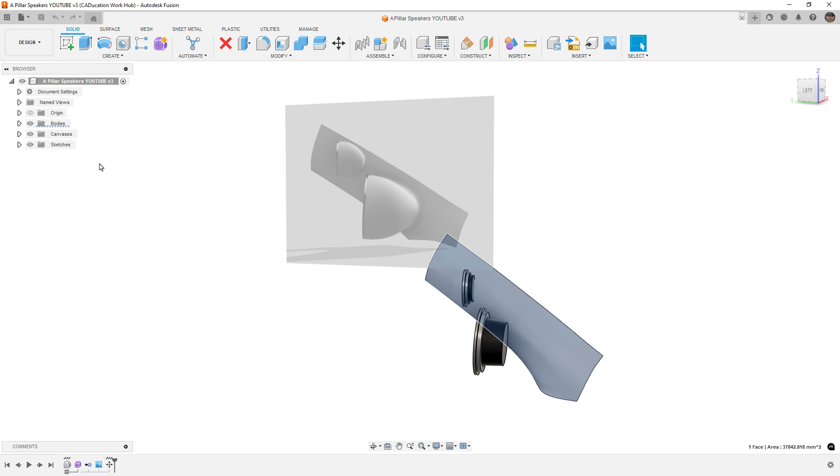Now, the problem when we're talking about doing surfacing work is, one, figuring out how we want to create the geometry. That's always something we need to consider when we get started. And two, figuring out how we're going to turn this into a solid model that can be manufactured, whether it's 3D printing or some other way.

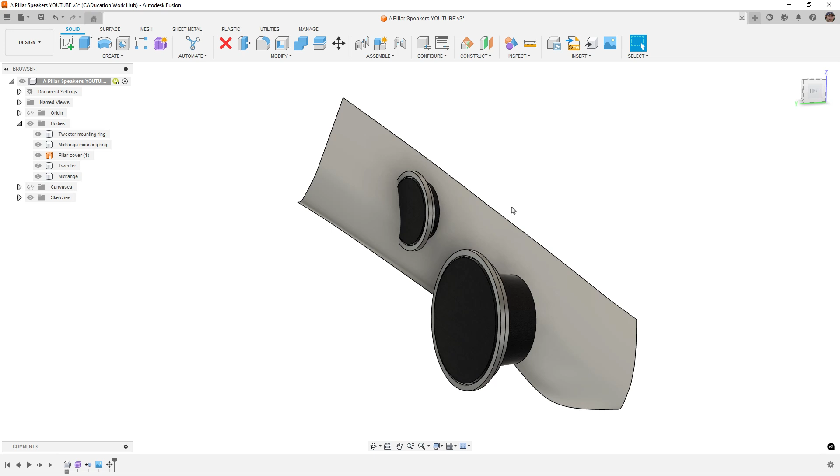Now the end goal for this user is to 3D print this. The idea behind it is that it'll get wrapped with some sort of cloth for the interior. But we understand, based on the way the speakers are positioned, that the original A-pillar is somewhat sacrificial. It's going to have to be cut because the speakers are nested into them.

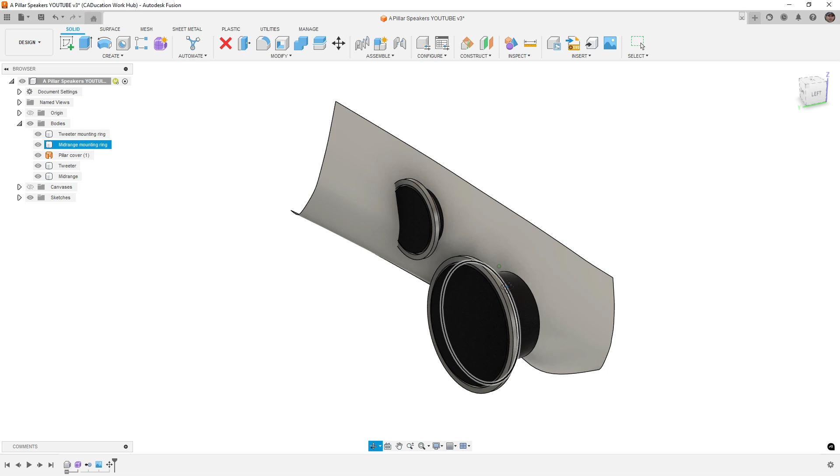A couple things we need to think about: the tweeter itself is well into the housing here, which means the approach we take for that model is likely going to be different than for the larger speaker, because this one is kind of completely outside with the exception of this back corner. So what I want to do is start with what I think is the easier one.

That's the mid-range speaker. So we'll hide the tweeter and the tweeter trim ring.

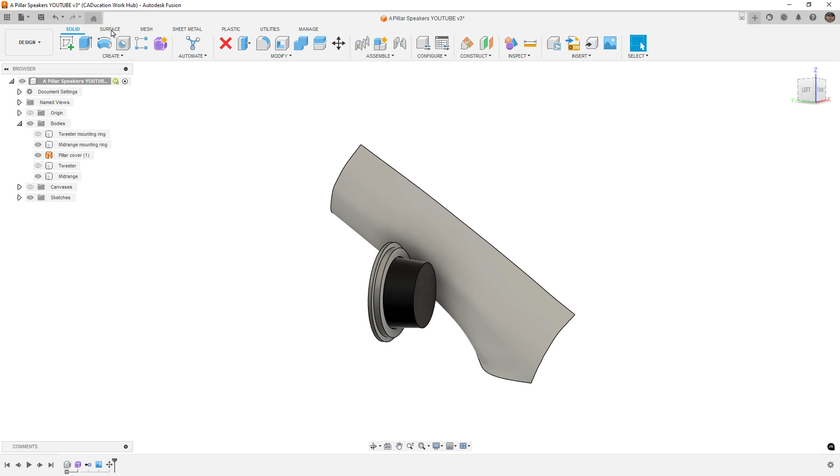So what I'm going to do is talk a little bit about lofting to a point. We're going to go to our surface tools to get started. I'm going to create a new offset plane off the back of the speaker to figure out where I want this pod to be. Let's say maybe 50 millimeters back.

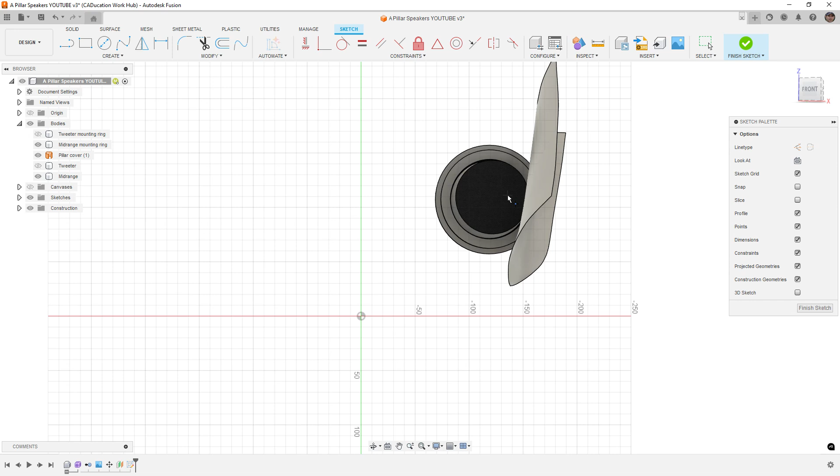And then we'll create a sketch on that new plane, and we're going to create a sketch point. I'm not going to define this with dimensions, I simply want to play around with it a bit. I'm going to put it right there.

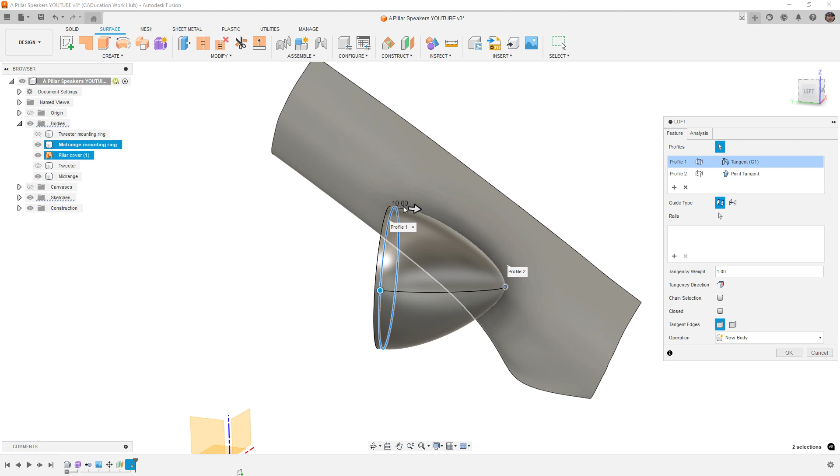And then I'm going to go to my create loft, and I want to loft to a point. So I'm going to pick the back edge of this trim ring and go to that point. The main reason we want to do loft to a point is because we have point tangency, and we've also got tangency from the edge we selected. This gives us the shape pretty much right off the bat.

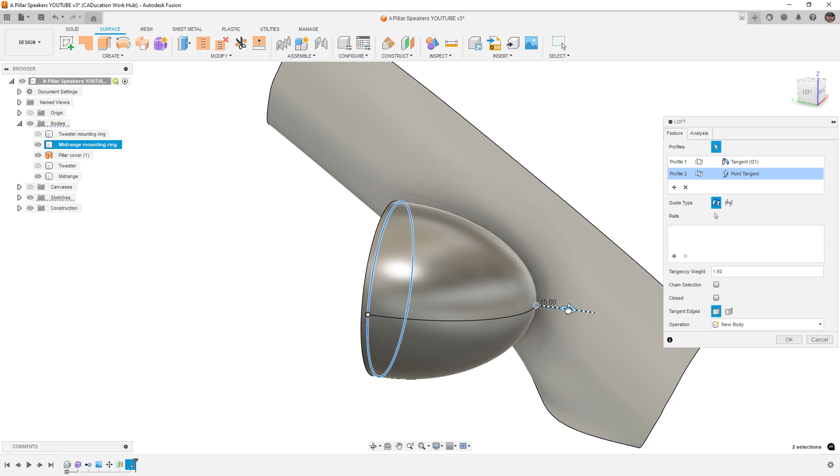We don't have to do too much. We can play a bit with the tangency weight, so if you want it to be a bit more rounded, we can push the tangency weight back to 1.5. We also have weight at the point tangency, so we can increase or decrease this. Basically, with a point tangency, this is controlling the surface going into it from every direction. And I think this looks all right.

And we've got a nice amount of overlap with the rest of the A-pillar. So I'm going to go ahead and say okay with that.

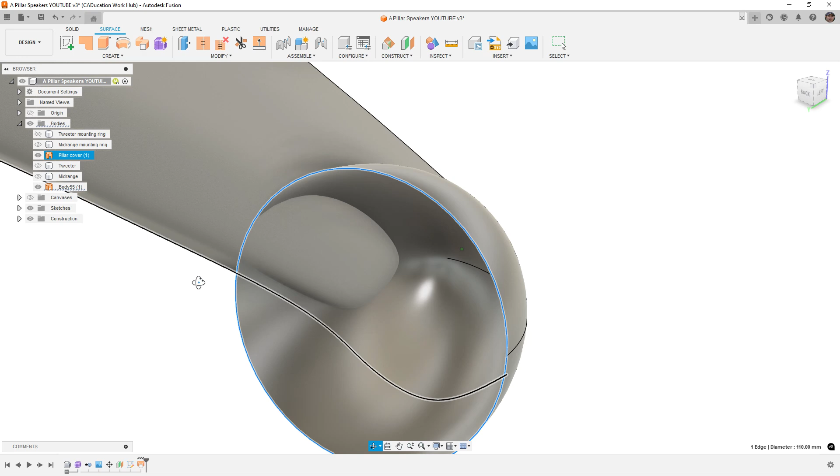I want to hide the rest of the solid bodies, and now I need to think about how we're going to build this. You can see right now the edge of the surface does not extend far enough to actually cut through. We can see that the inside A-pillar bleeds over this edge.

So we'll either need to go through and extend this forward, which is one potential option, or we need to patch the front of this. And when we patch it, what we want to do is stitch these together because they need to be one surface, but now it's completely enclosed.

It's what we consider watertight, which means it automatically turns into a solid body. The problem here is we need to trim surfaces, not solids.

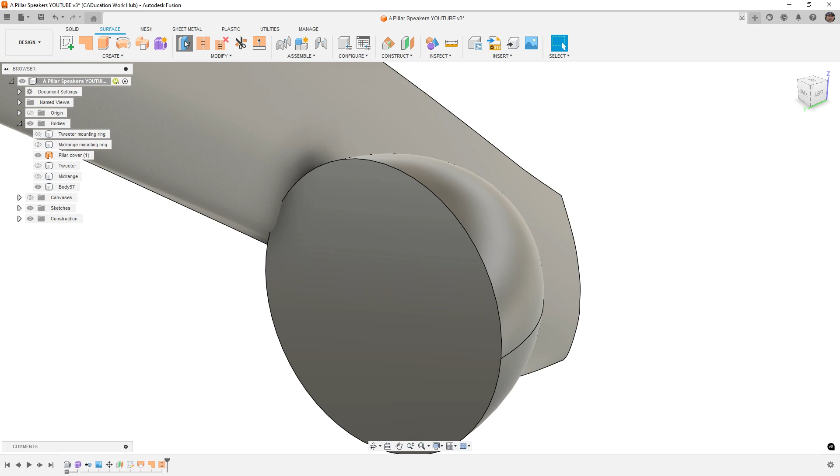But what we're going to do is use split body, select the A-pillar surface as... hold on, let's go ahead and step that back. What we want to do is split body. I picked offset face. We want to split the new speaker housing, and we want to use the A-pillar to do it. So this little piece that gets left inside, we're going to right-click and remove.

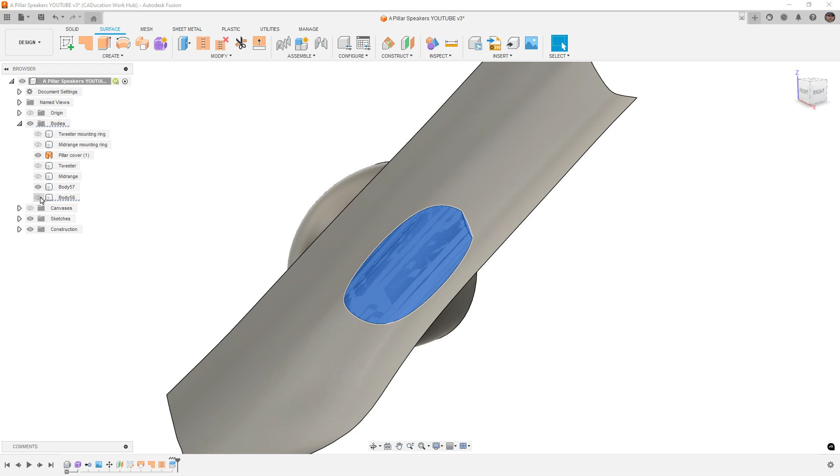We don't need it. We'll hide the A-pillar.

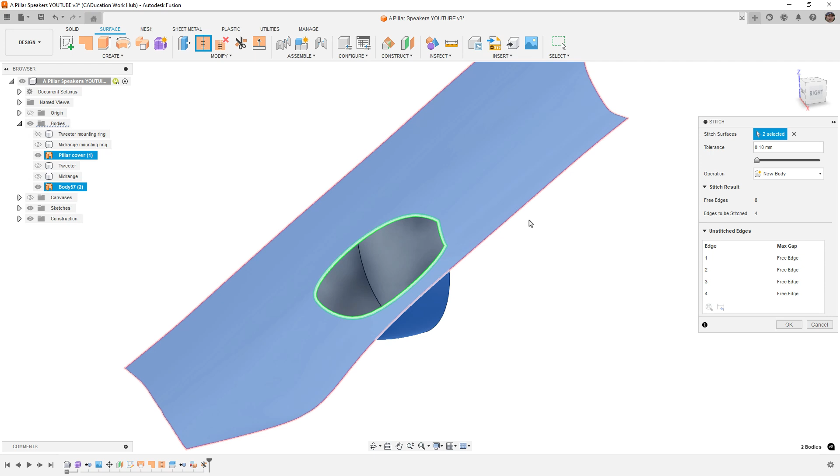Because we're in our surface tools, if we select this face and just hit delete, it'll convert it back to a surface. Now what we can do is use the new speaker housing as a trim surface to remove that extra little piece in the A-pillar and then stitch them both together. We don't really need the front portion here, but I'm going to leave it on for now—it might come in handy later when we thicken this thing.

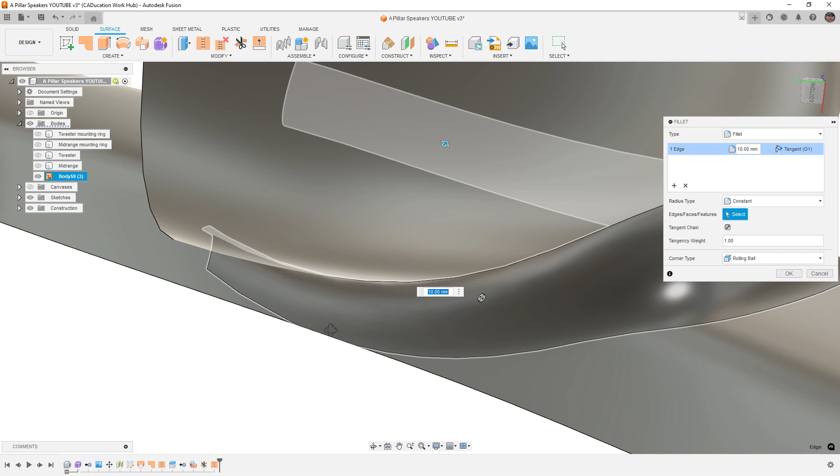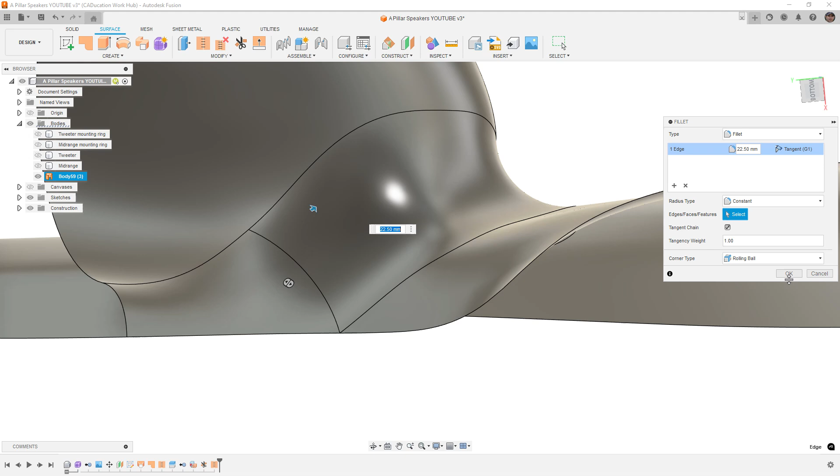Now that these are all one piece, we can go to our fillet, grab this, and start to make a relatively large fillet. The restriction here is we want to be careful with this bottom edge. While it will allow us to create a larger and larger fillet, what we're going to run into is this edge starting to deteriorate—we're losing the clean edge, which is likely going to make thickening this into a solid harder. I'm going to go ahead and say okay with that extremely large fillet.

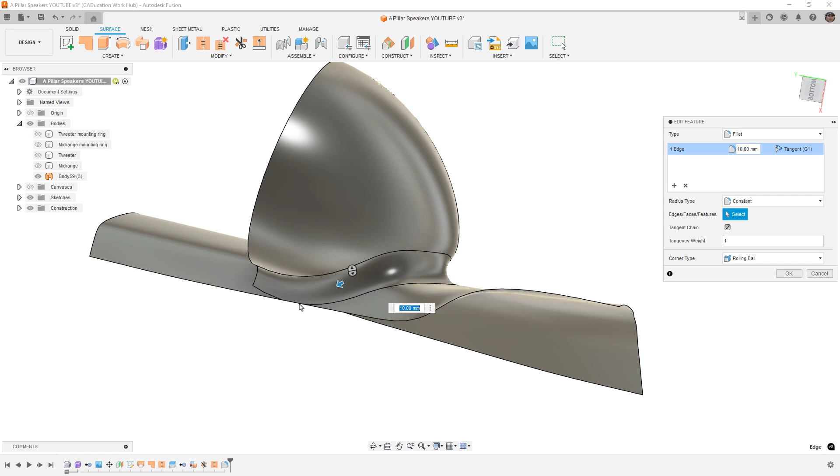I'm going to go to create and thicken. We want to select the body from the folder, thicken it 2 millimeters, and see what happens—you can see it's failing. Let's say -2, go outward, and you can see that's failing too. My guess is it's because of this fillet. I'm going to go back to this fillet and make it smaller until it doesn't affect that edge—so it looks like maybe 8 millimeters—and then try the thicken again.

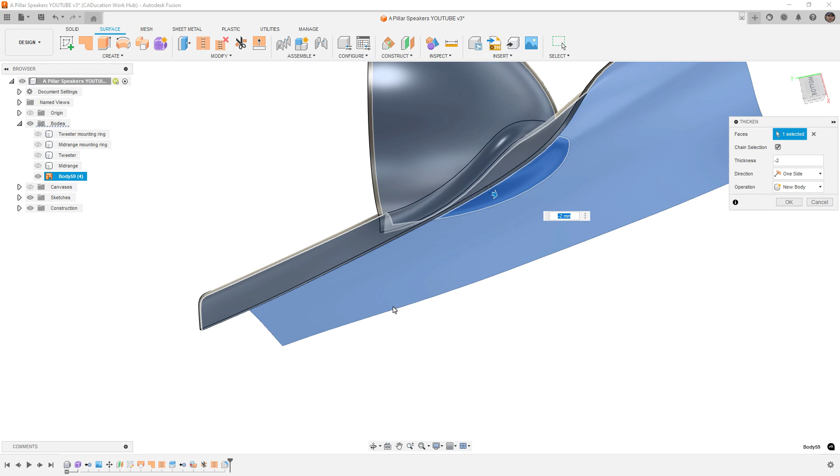So now let's say 2 millimeters, we want to go inside—that's fine. If we go 2 millimeters outside at -2, we can see that's fine as well. So again, the big reason we weren't able to do that is simply based on that fillet.

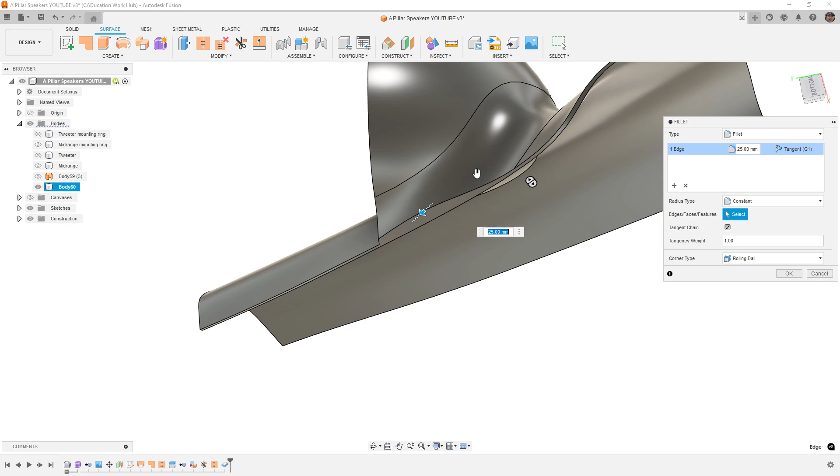Now, a way you can get around this is by thickening before the fillet. So if we select this and go 2 millimeters outward, -2, and then come back with the fillet, now we don't really care so much about affecting that edge, but you can see it's starting to get thicker and leaving a little bit of a lip up front here. So these are the reasons why we need to be careful with this.

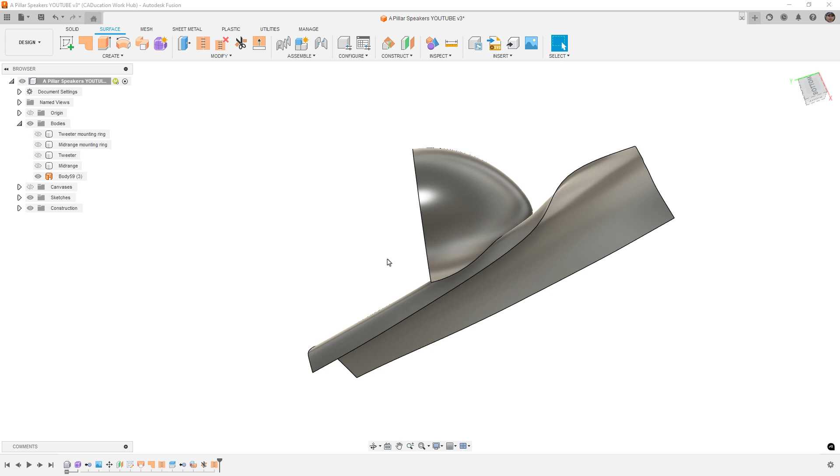But the main thing we've learned is that we can thicken this, but we have to be careful with those features. So I'm going to step back and get rid of the thicken, and I'm actually going to leave this square corner on for now—we'll come back and add the fillet later. But we now know we've got sort of a limit of about 8 millimeters.

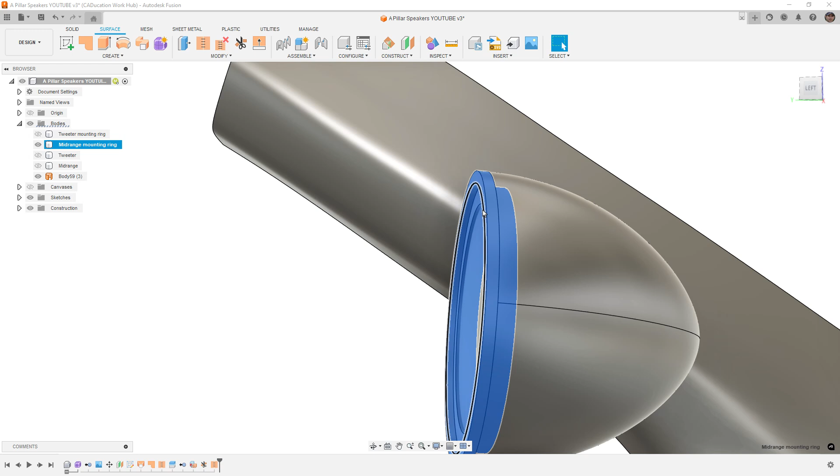Now, before we go too much further, let's bring back that mid-range trim ring and just make sure we can incorporate it, because the trim ring itself comes all the way to the outside, and really what we need is this sort of inside surface here. So we're going to take our offset surface tool, grab basically everything on the inside here, and say okay—that's going to be sort of like a trim surface.

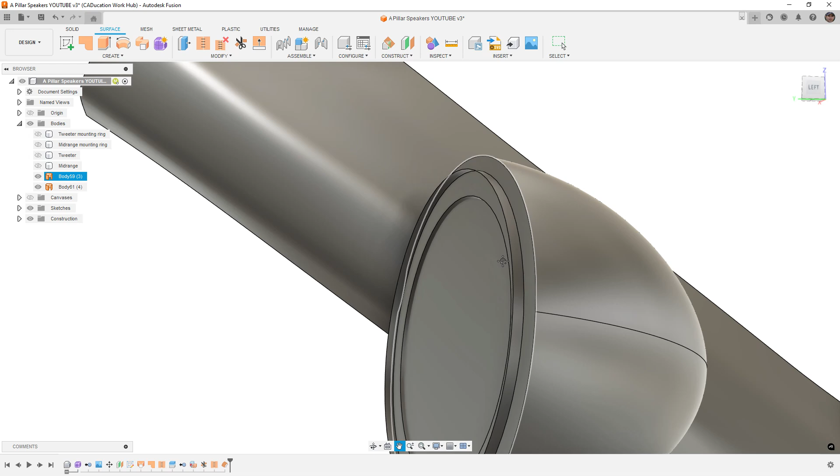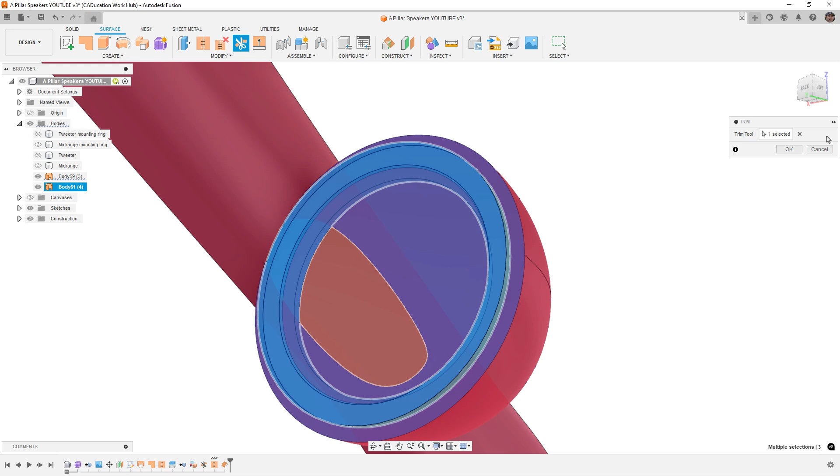So we'll use it as a trim tool, and then we'll try to get rid of everything on the inside. This could be tricky, and it extends all the way through. So the trim tool is that, and we want to get rid of—let's see, it doesn't like that inside piece. Let's just get rid of this for now.

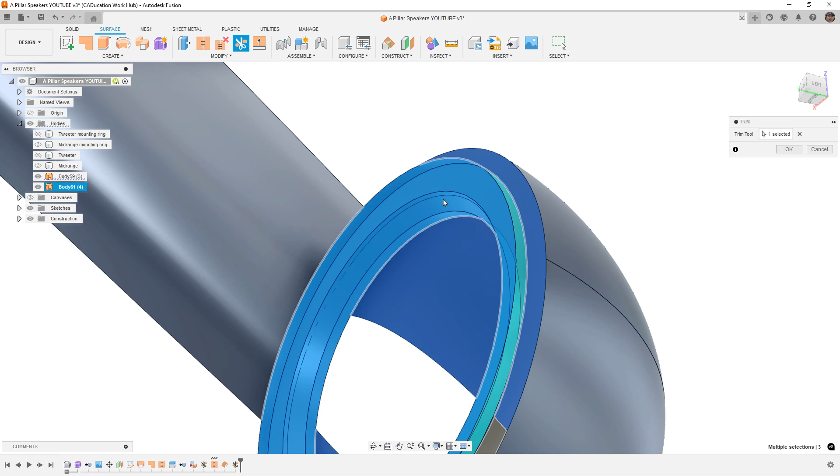All right, so what do we have left? We've got basically this section right here—we need to use that as a trim. So instead of selecting the entire body, maybe I can just select that. No, that last one didn't work. All right, we're gonna have to put a little bit more work into that, but that's okay.

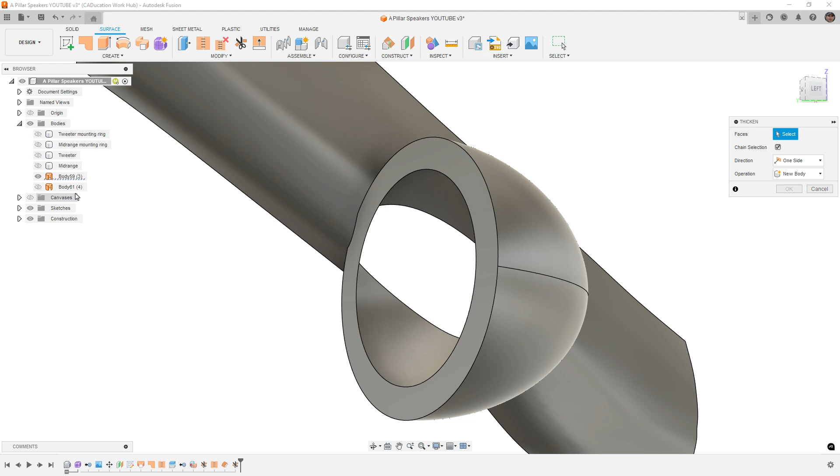Basically, we've opened it up, so when we thicken it, we can add that mid-range trim ring back, and it should be okay, because the inside surface right there, when that thickens outward, we may just need to clean up that face a little bit. But I'm okay with that for right now. Let's double check that it can still thicken before we go too much further, because that would be a bummer to get farther and then not be able to actually create it.

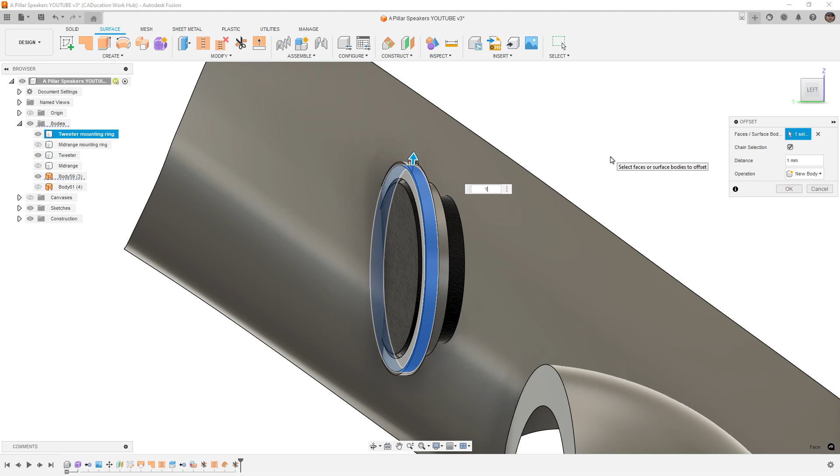So now let's go take a look at the tweeter. The tweeter is going to be more difficult because it's embedded in the A-pillar, meaning we need to account for actually clearing out some area. So what I'm going to do to make this work is offset this outside section—I'm going to go out just 1 millimeter. Now, we're going to be thickening 2 millimeters, but I want to give myself a little bit of a gap.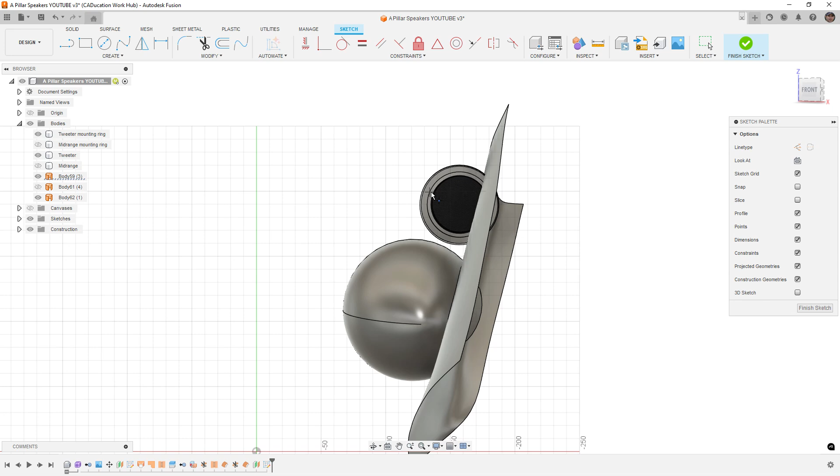And I'm going to be using this to create the pod. Then from here, once again, we're going to create an offset plane on the back, figure out where we want it to blend, and then add our point. So create sketch point, again kind of inside a little bit—we don't want it to be centered. And then we'll do our loft: going from our offset surface, loft to a point, tangent, tangent, maybe increase that so they are similar—take it back to 2... yeah, maybe 1.5.

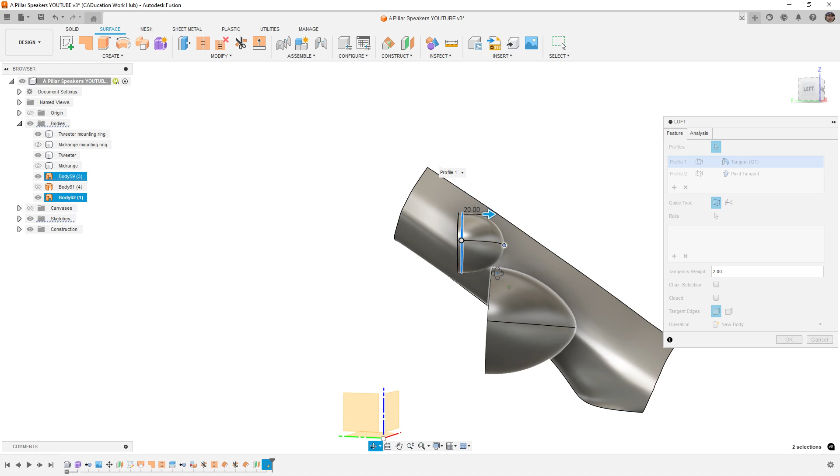Yeah, I think that looks okay. All right, so now we've got our trim ring and this piece. I am going to stitch those together and get rid of the tweeter and the mid-range.

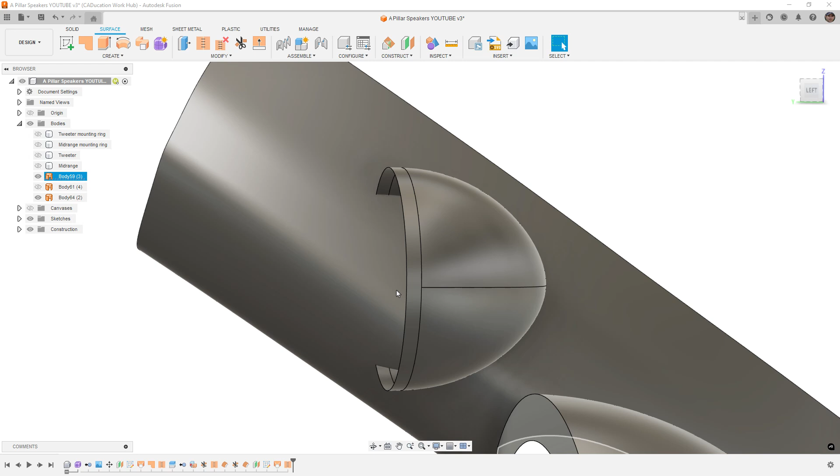All right, so this one's a bit trickier because not only do we need to build out this pod, we also need to cut away some stuff from the inside. So I'm going to go basically about the same process: cap the end off, stitch them together, which turns it into a solid body.

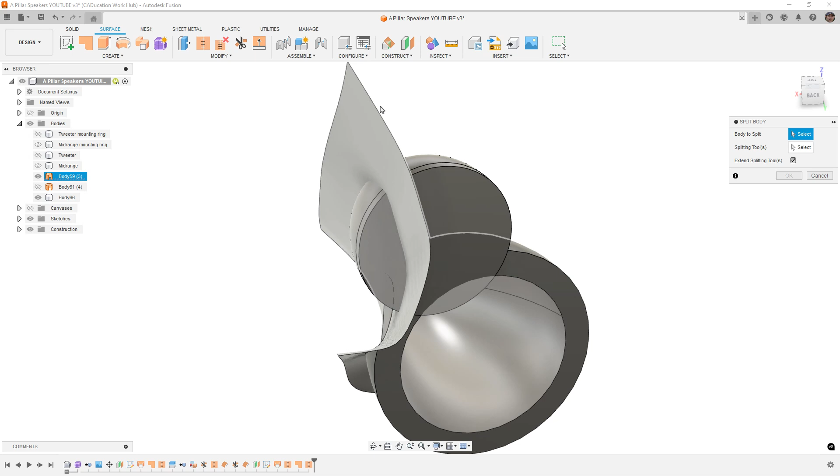And then we want to use split body, body to split, splitting tool. And then this guy right here, don't need it, so right click and remove. Hide our A-pillar surface, select and delete. And then now we can use it as a trim.

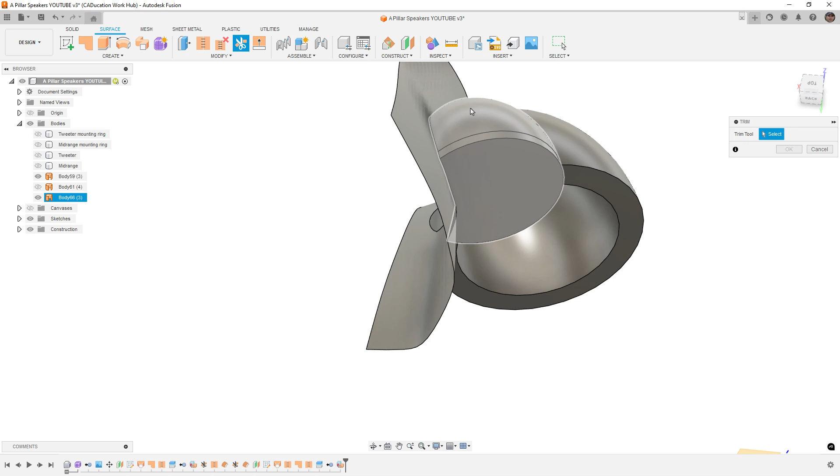So theoretically, we have now created basically very similar shape to what we did down here. The second part of this is that we actually need to extend this out. We need to cut a cone out because we can't block the speaker.

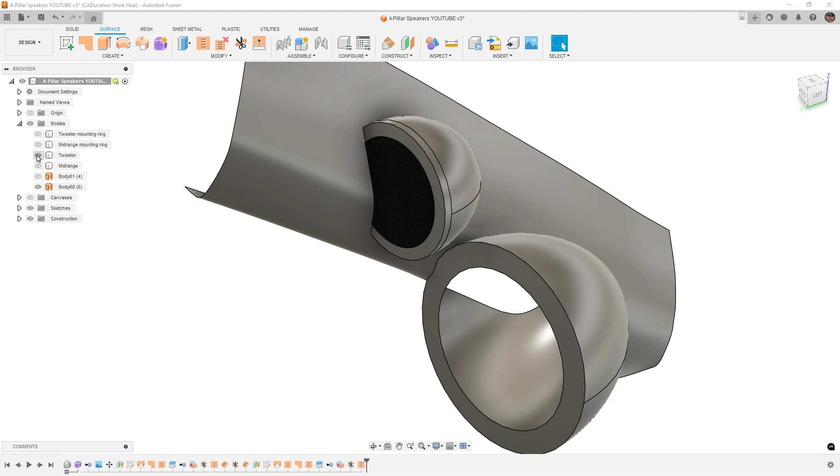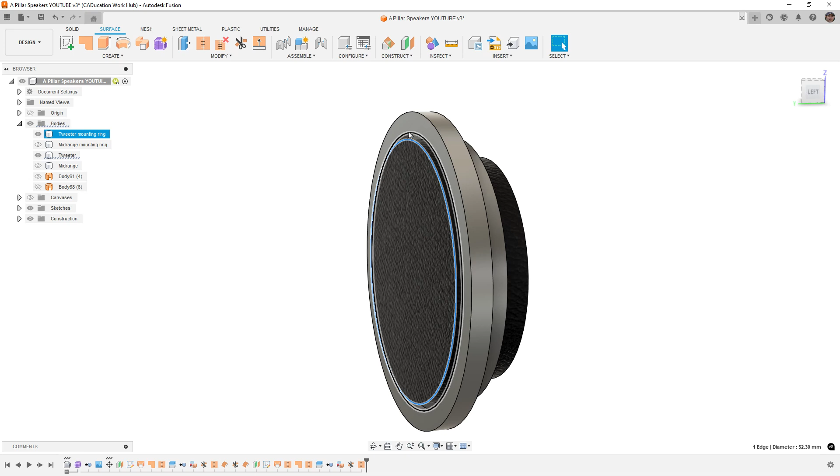Now this, we've got the tweeter trim ring and we've got the tweeter itself, so we can kind of get an idea. This right here is the piece that cannot be obscured. And the trim ring has actually got a little bit different geometry. So we've got the speaker and then we've got this sort of internal edge here, which is big enough so that the rest of the speaker can be inserted.

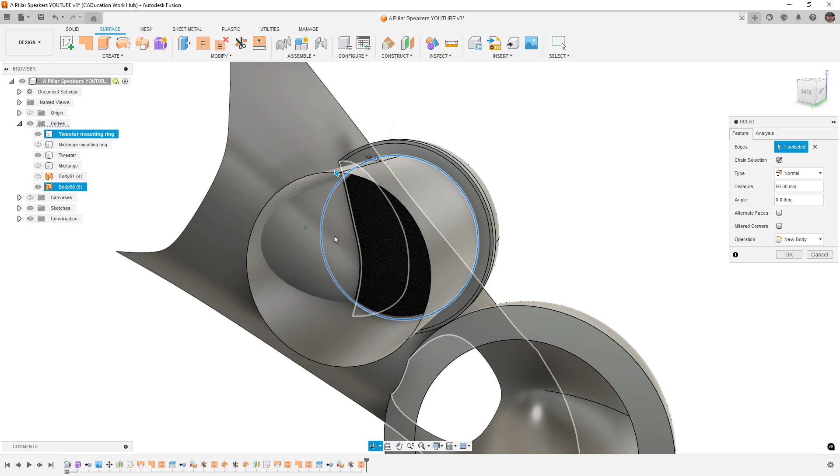So I am going to take this surface right here, and I'm going to go to create ruled surface off that edge. And we can do normal, so we can kind of bring that out. We can look at the A-pillar, and if we want to, we can go out 5 degrees, 10 degrees. Let's make that minus, and sort of make it so that it's expanding as it goes away from the speaker.

That looks okay. And a big thing that we need to consider at this stage is we need to remember that we're thickening this into a solid. So if we thicken this outward 2 millimeters, is that going to obscure the speaker?

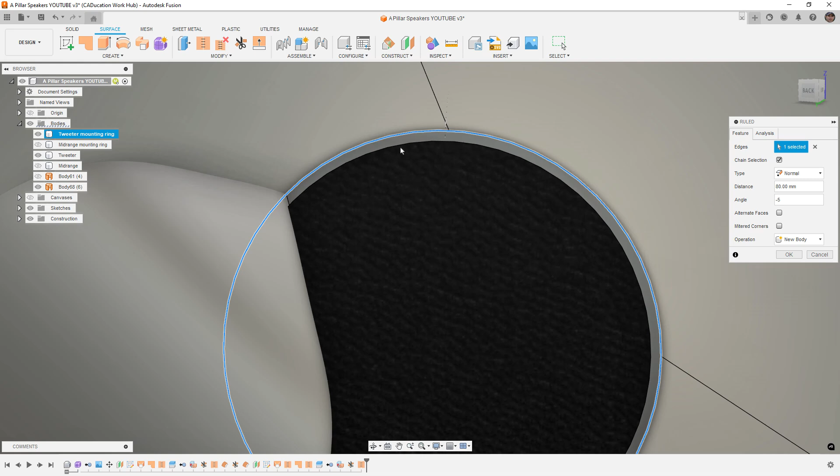And if so, do we need to then grab one of these external edges or maybe offset it or something like that? So what I'm going to do is go to offset, and add just 1 millimeter here. I'm going to get rid of the inside one, I don't really need to see it.

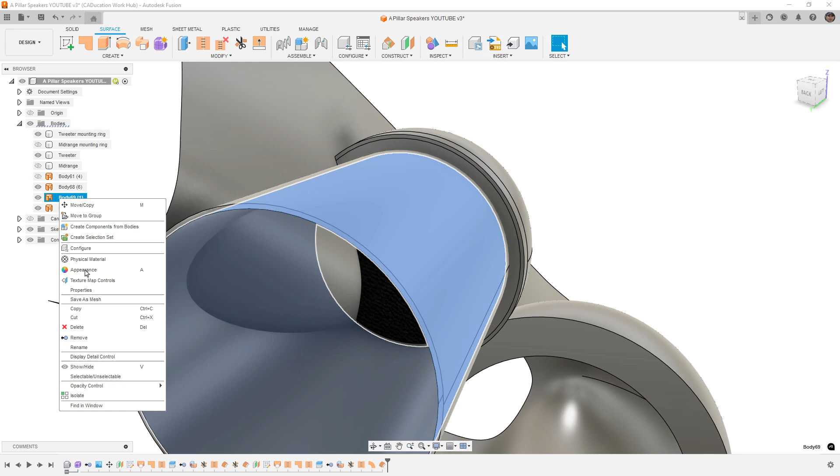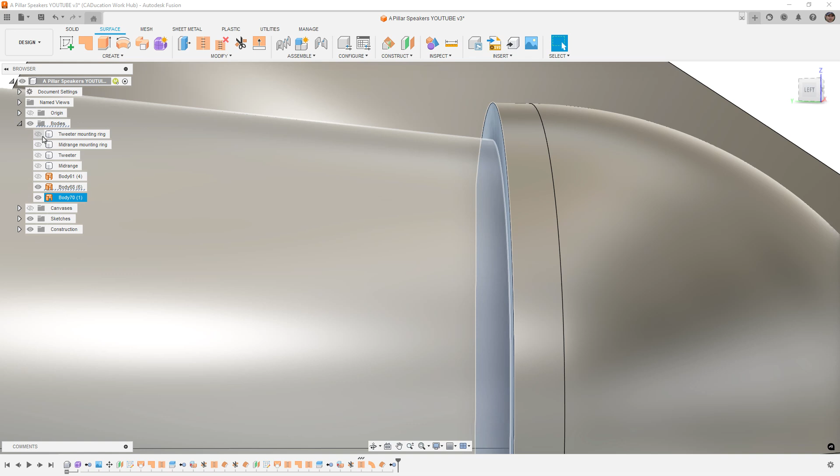And now what I really need to remember is that when we offset something, it's going to be offset in the normal direction. So what this means is I really need to be on this plane here. So if I hide the tweeter and I hide the trim ring, I need to be on this plane. And right now it looks like it may be overlapping a little bit.

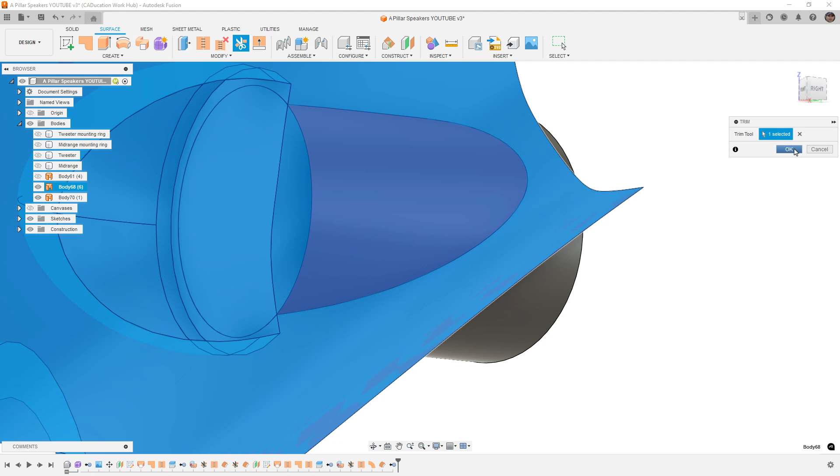So what I'm going to do is use that plane as a trim tool just to make sure that I don't have any overlap. And it looks like, well, let's just see, trim that part away. And then we'll repeat that. And now we'll use the A-pillar to trim away this outside piece.

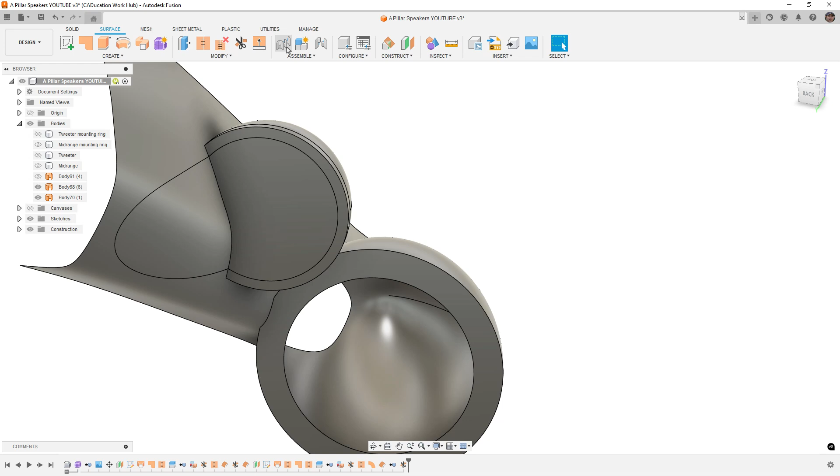Nope, looks like I got rid of too much. Let's undo that twice. All right, so A-pillar, trim away this piece, and see what we're left with. Repeat that, and trim away this. And we're left with that section there.

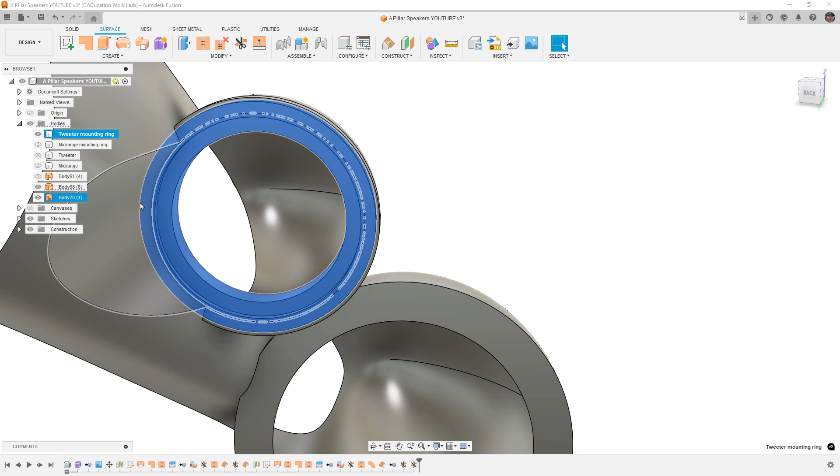So if we bring the tweeter back, it still fits inside. The trim ring still overlaps enough, you can kind of see where it goes to. So we can build that trim ring into the geometry here. So everything's looking okay, let's stitch these together.

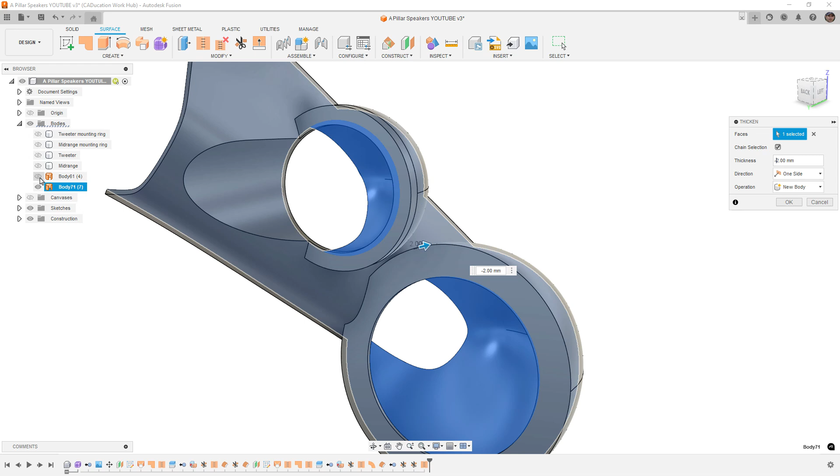And let's try to thicken this. All right, so thickens 2 millimeters outward, okay. Let's try inward just to see in case we need it. Thickens inward okay as well. We really need to thicken outward because we're dealing with the surface of the A-pillar and we can't go inward.

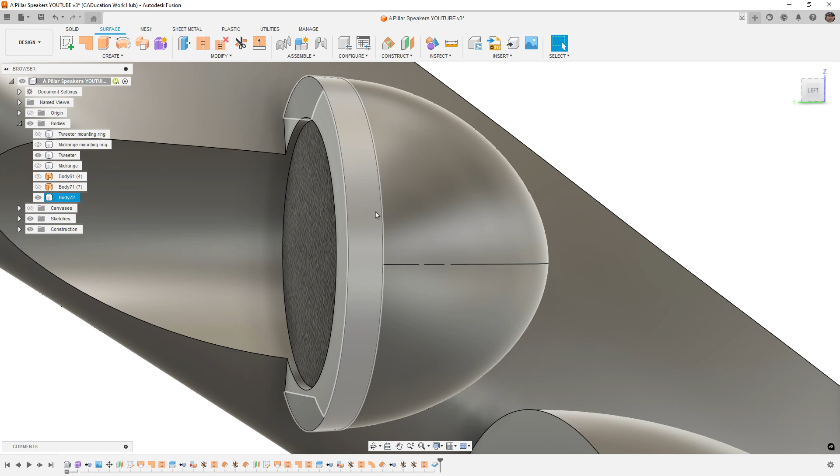So we need to go outward, but we always have to pay close attention to things like the tweeter. You can kind of see here, we still have a gap, which is good. So everything works there. It may be sunken into the housing a bit much, so that's something that I may need to correct.

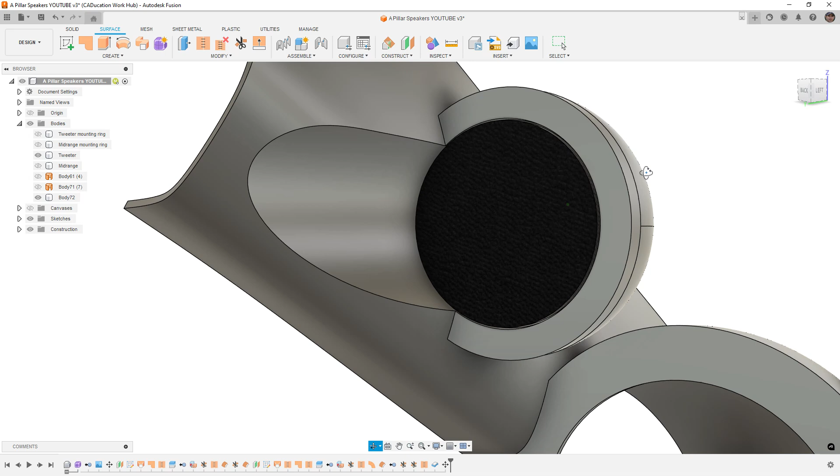But for the most part, we could take the tweeter and the trim ring, and I'm going to move it. I'm going to make sure that my coordinate system is going normal because I don't want to change the angle of the speaker, and just to make sure that everything fits and that we don't have any overlap. All right, still looks like it fits okay, so I think I'm happy with that. So now we have a thickened solid body.

The last step is to go ahead and round the corners and then maybe add some of those trim rings in if we need to. So I'm going to start a fillet.

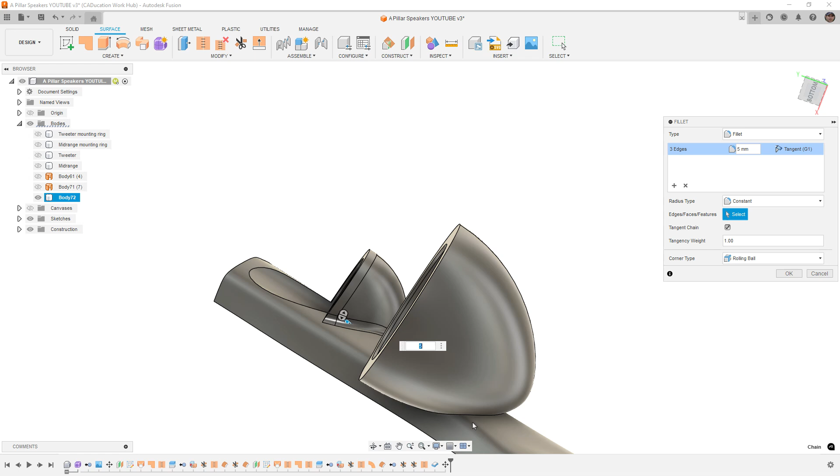I'm going to try 5 mm there. That looks okay. Hold down Control and try this one. See, that looks like it's okay, it doesn't hit that edge. So we can try to increase it. 8 is about as far as that's probably going to go before it starts to mess things up.

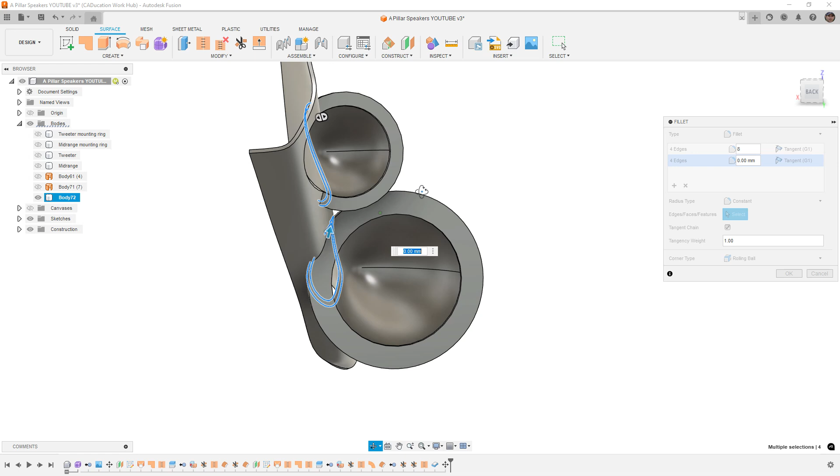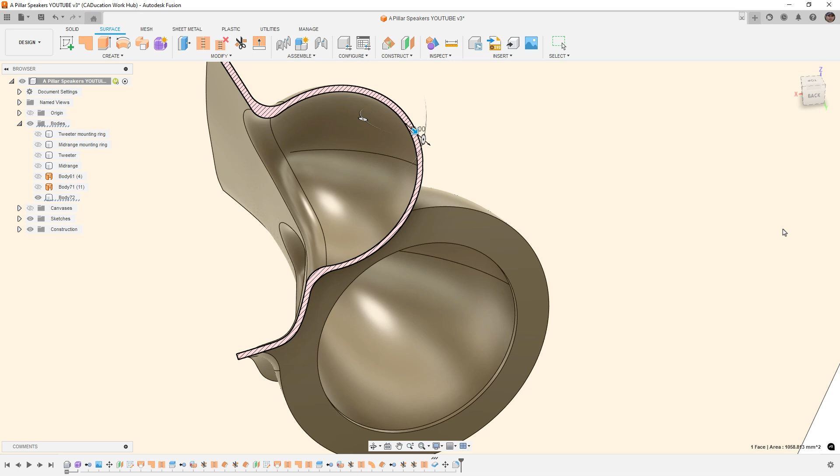I'm going to add a fillet to the inside. When we think about the inside and the outside, we need to remember that we thickened it 2 mm. So if we do, say, 6 mm on the inside, let's take a look at this with a section analysis. You can see that leaves a thick section here. So what we need to do is go, let's say, 10 on the inside, and that will be a consistent thickness.

Now you can see it's giving us an error. It doesn't seem to like going all the way to 10. Let's see if 8 will work. And if 8 works okay, we can adjust the outside. So we can decrease that - sorry, go the other way. 6, and say okay. Man, it really does not like that fillet.

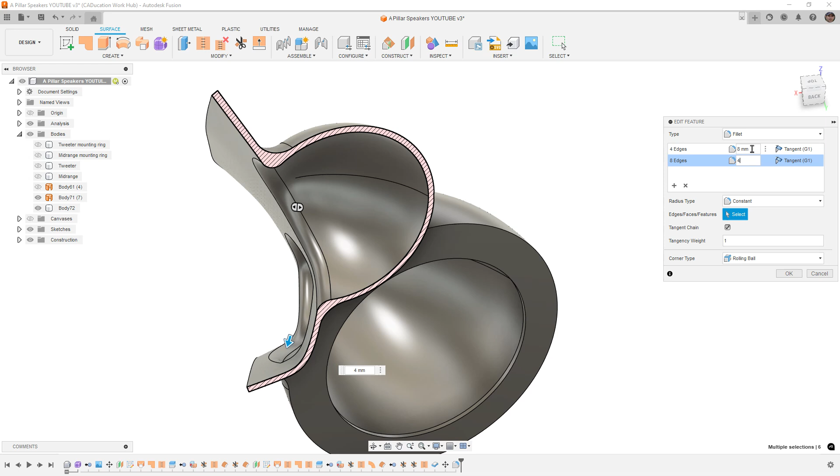All right, let's try this again. We'll go 4, and we'll take that one down to 4 as well, make sure both. It's giving me an error somewhere, and I'm not really sure where. It's a weird graphic glitch there.

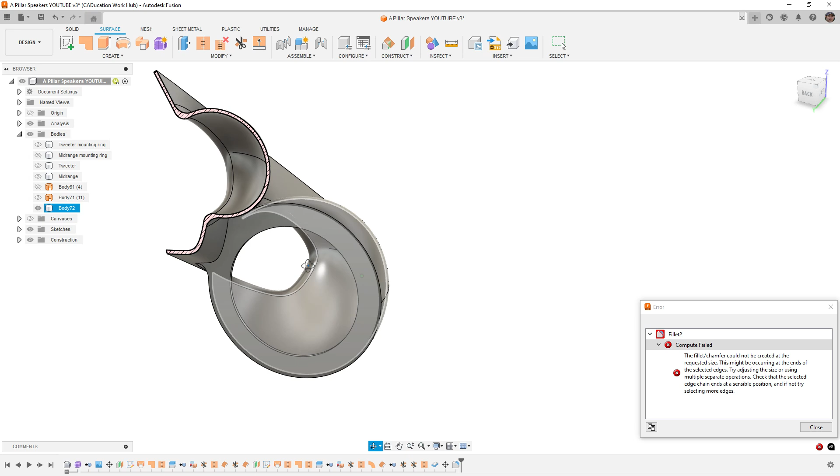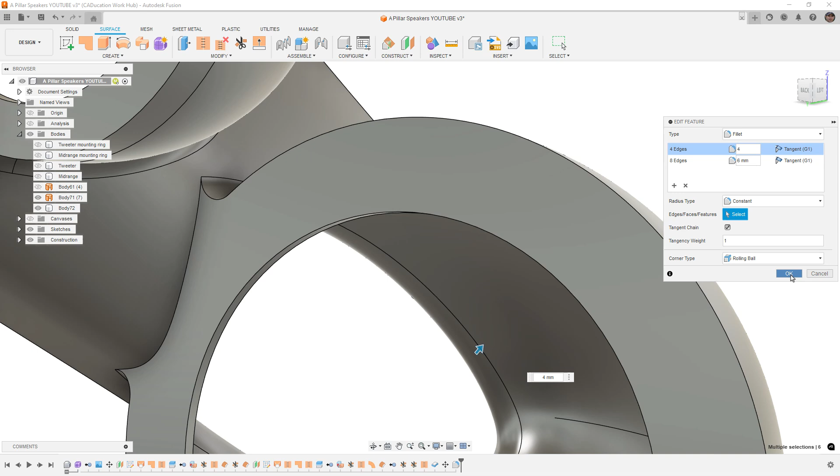It's right here. Okay, it's because they're overlapping - that's the problem. So it's the fillet on the outside that's the problem, this one here. So those two can't overlap. Let's say okay. All right, I'm going to just delete this and try again. It's something on the outside it's not liking.

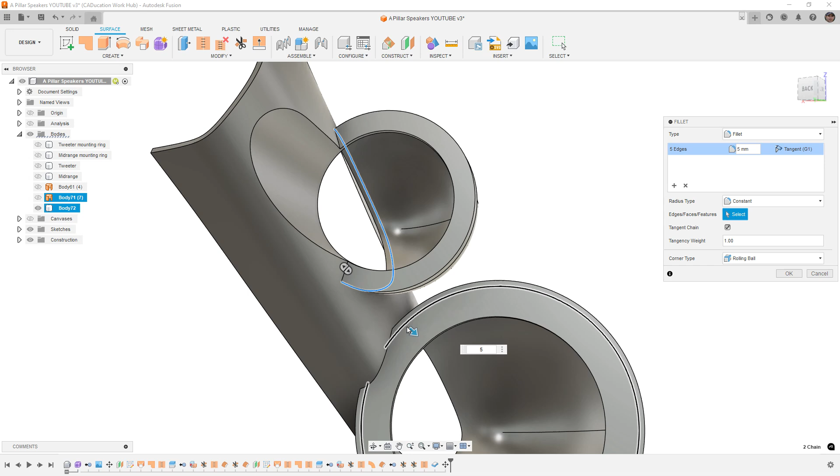I'll rotate this around. Let's try 5, and... no, and 5. All right, so those are okay. Now let's try the inside. So that should be 7. That should be okay. All right, so now we got them blended.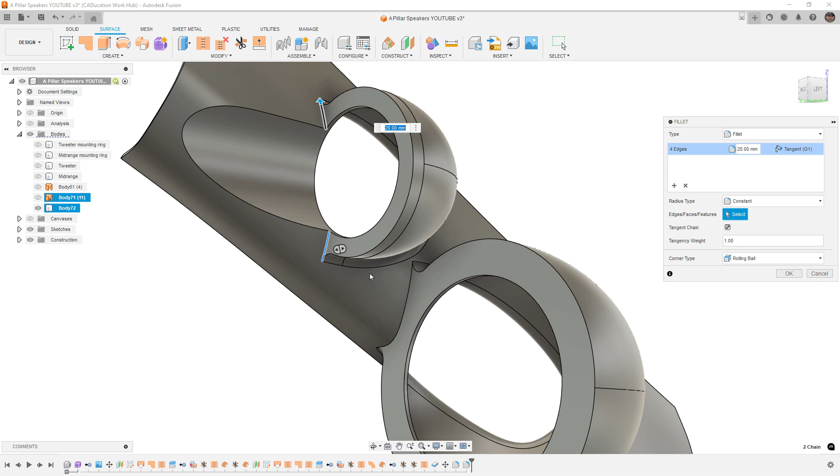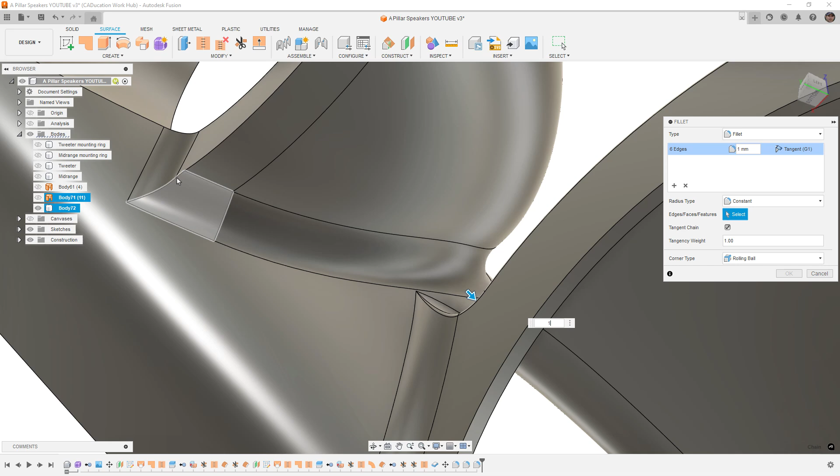If you need to, you can add fillets to edges like these front ones if you want to round them off. You need to be careful with how much, obviously, because if you've got a trim ring or something here, you might not want to go to 20 mm, 10 mm. We got to be real careful with these overlaps here. Generally, if you have multiple shapes like this that need to blend together, it's a good idea to take a step back and do something like some more advanced surfacing work in those areas. But for right now, I think just keeping in mind that these are presenting some problems is okay.

I'm also going to add one there. All right, so now we've got the two shapes. It's a solid body - we could 3D print this. Let me go ahead and add something here. We could 3D print this and install the speakers.

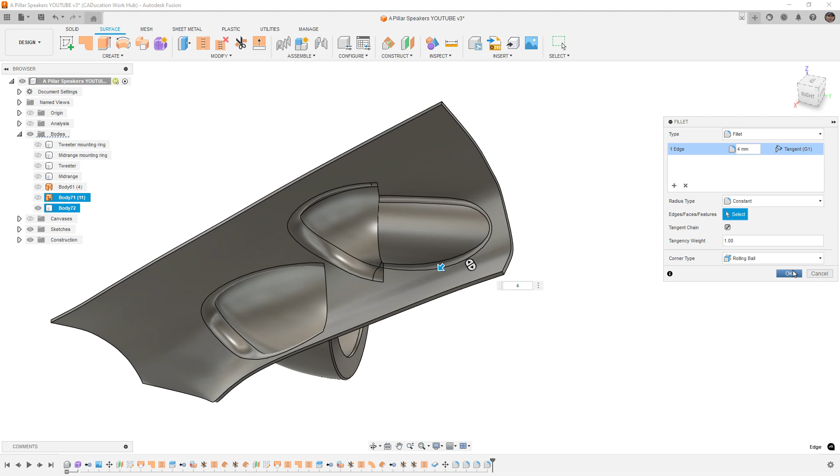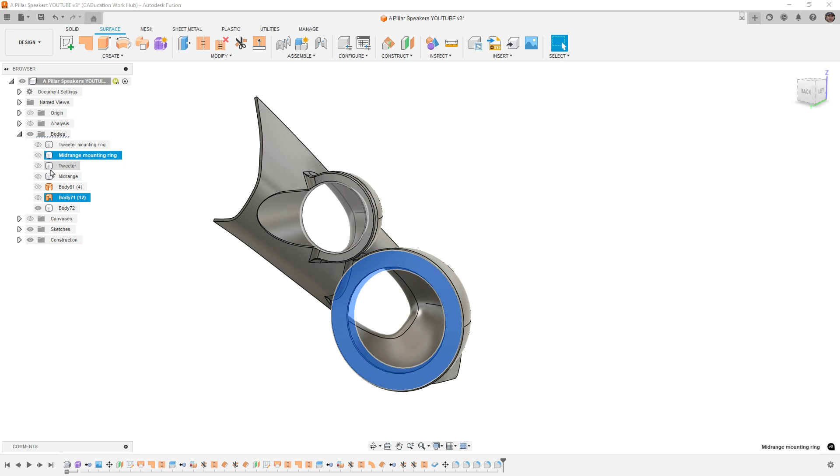The last real thing we would need to do is make sure we incorporate the trim rings, or at least the geometry for the trim rings. Because these are now solid, that's something we could just select the face, create a sketch, and add all the features that are needed. I'm not going to go through that process because generally what we could do is just extrude or create the same features that we have for these trim rings, and I don't think that's really as important as the surfacing work that we did.